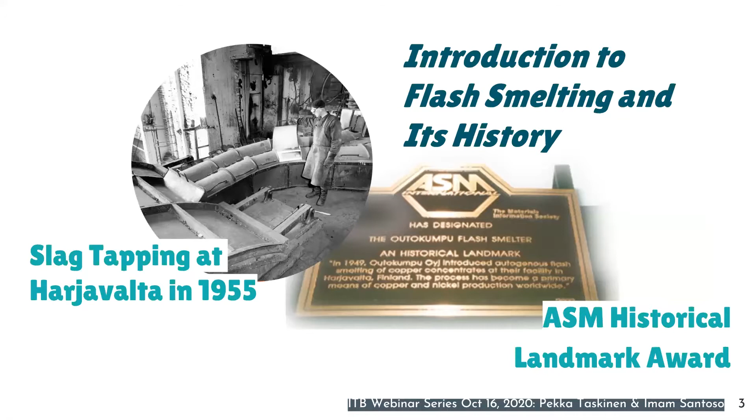First, because this is the first copper webinar of ITB, I decided to include some historical background into this talk. Flash smelting, as it was invented in Finland some 70 plus years ago, has some interesting features which may be of use in understanding some issues which come later. Flash smelting is an invention of the late 1940s, but its basic and fundamental areas were patented and presented already much before that, and what is the actual invention of this Finnish company Outokumpu, who put the idea into industrial use.

It is really the industrial large-scale operation of the first flash smelter, which was done in Harjavalta, Western Finland, in a smelter which is now called Boliden Harjavalta. Since that time, 57 flash smelting plants have been built and delivered to customers, and out of those, a few have been closed by now for various reasons.

So what is the essential feature of flash smelting and flash converting is that it generates its energy by itself. So the heat balance of the operation is the key to run the furnace on a continuous basis. And it is often described with such diagrams which tell on the left-hand side the reaction heat generated as a function of matte grade and the various flows of energy needed for heating up and maintaining the process temperature in the furnace for matte, slag, gases, and heat losses. And this is the core of running flash smelting.

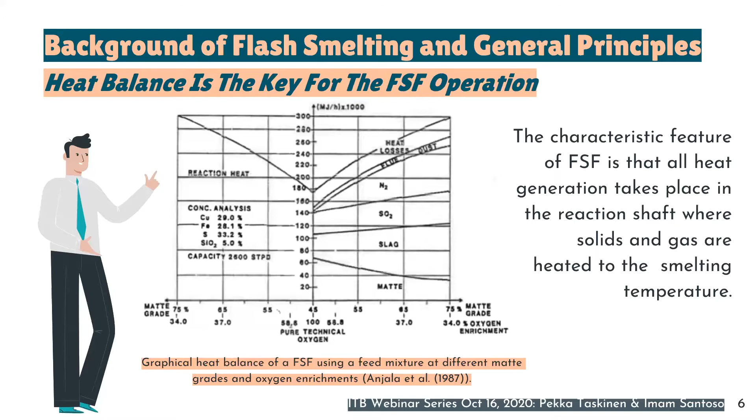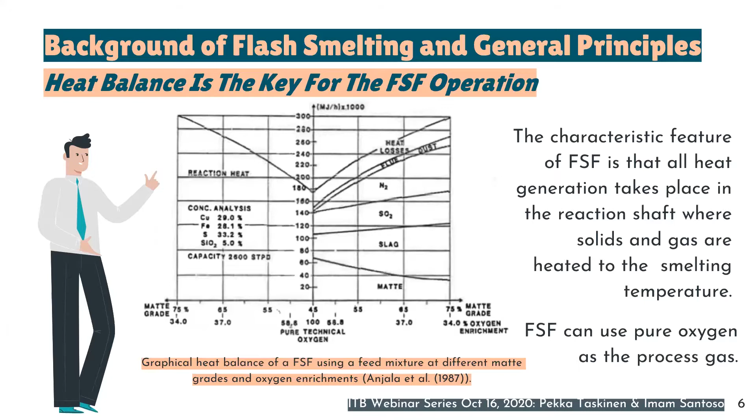And also pure technical oxygen can be used in flash smelting. So there's no limitations in that respect in the technology.

So why has this technology been successful, so that in 70+ years, more than 50 furnaces have been built. It's based on closed furnace design, reliable auxiliary equipment, and very much increased specific capacity since the very beginning. And this is a result of continuous R&D development of first flash smelting by Outokumpu and Outotec.

Another feature which may be minor in some opinions is that flash smelting, flash converting smelters and DON, direct Outotec nickel smelters, don't have launders. There is no ladle transport of matte, which technically allows easier scheduling of the smelting operation without fumes from ladles and launders.

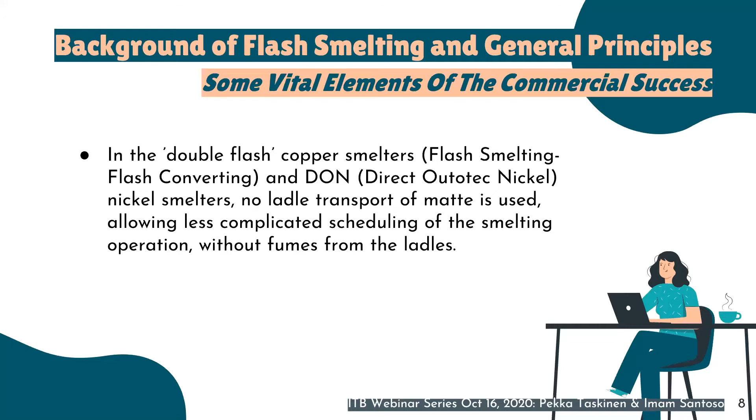What that means in practice, or has meant in practice, is that sulfur capture in flash smelting operations has been very high. The data comes from Brook Hunt, it's not Outotec data. And this graph shows the sulfur capture and its development from early 1990s to 2010.

It shows that the sulfur capture has been in flash smelting processes more than 90% all the time, whereas the other technologies, even though they have been improving, their share in sulfur capture to sulfuric acid has been rather low 30 years ago, and it's still much lower today than flash smelting.

And this autogeneity, the capability of collecting chemical energy from the sulfide concentrates, means that there's very little external energy, fossil fuels used, and that means that the carbon footprint of flash smelting has been always very small, going down along the years. But compared to other copper smelting technologies, this gap is between 30 and 40%.

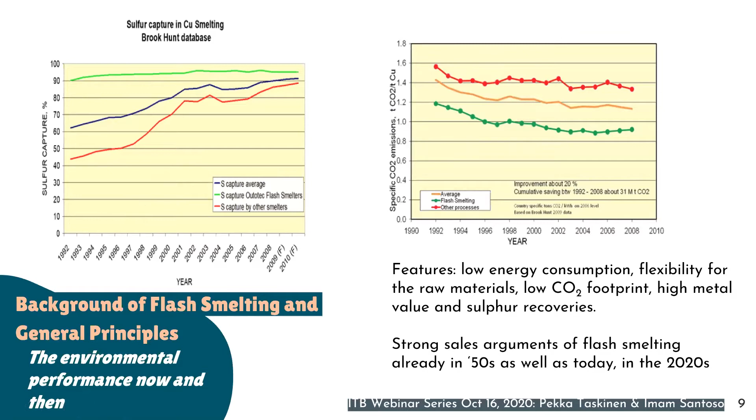So these have been always good sales arguments for the technology, and they still are that.

So what is the result of the originally selected furnace vessel design and the operation of flash smelting? No leakages of SO2 to external atmosphere, low fugitive emissions on the site, and good in-plant hygiene and best environmental performance amongst various copper smelting technologies.

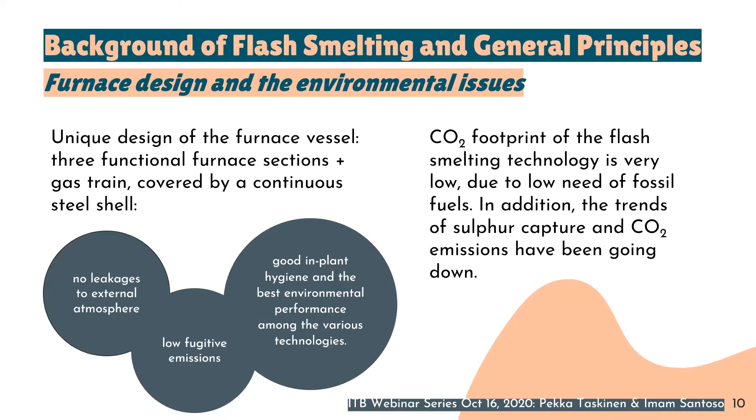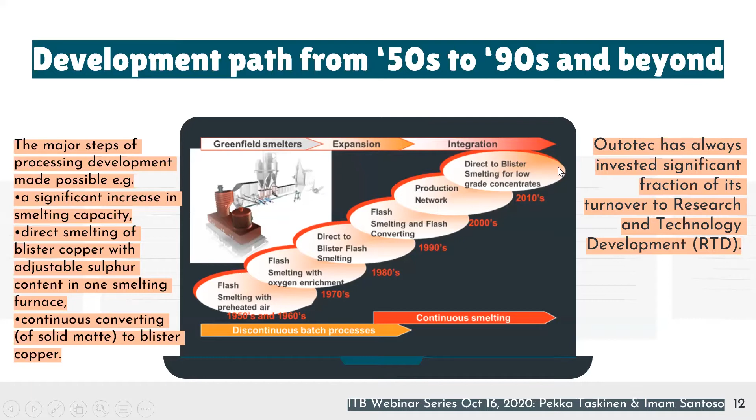So we had first air preheating, which was converted into strong oxygen enrichment. Then came direct-to-blister flash smelting and flash converting, and further on some refinements of these technologies.

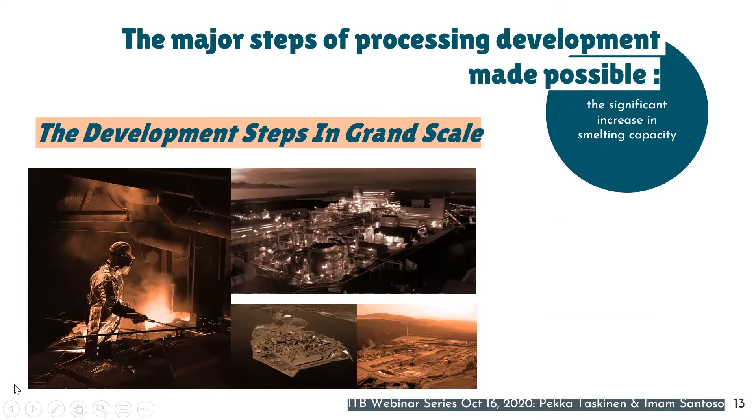So what we had there in a big scale development was significant increase in smelting capacity in furnaces which were built before, direct smelting of blister copper with adjustable sulfur content in one furnace, and continuous converting of solid matte to blister copper. So these are the major achievements in flash smelting.

And for those purposes, also a lot of advanced R&D tools were adopted in Outotec's activities from the 80s.

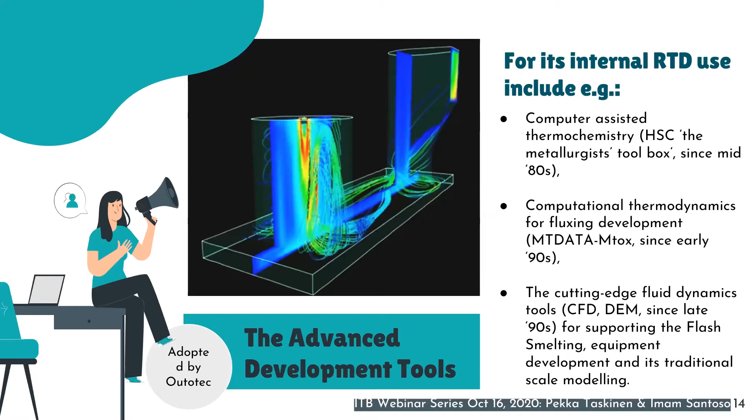And this ended up with, along with time, an increasing number of copper smelters and nickel smelters using flash smelting.

So the cumulative total capacity in the world by flash smelting has increased all the time, and today more than half of copper is produced by flash smelting furnaces and technologies with its various variants.

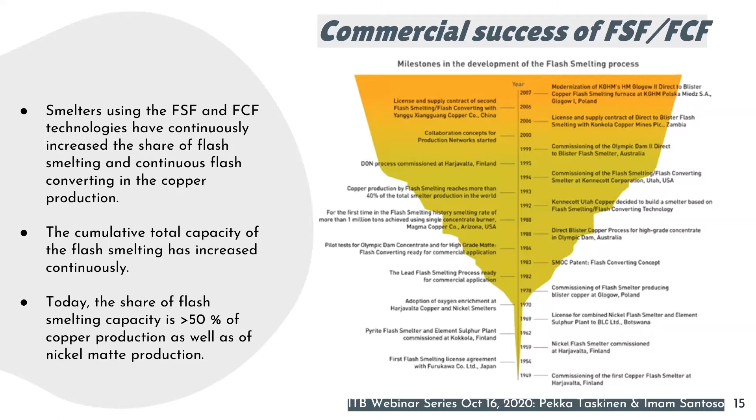All right, this was my lengthy introduction to you about the history and kind of boundary conditions where copper smelting was struggling in decades from the late 1940s till today.

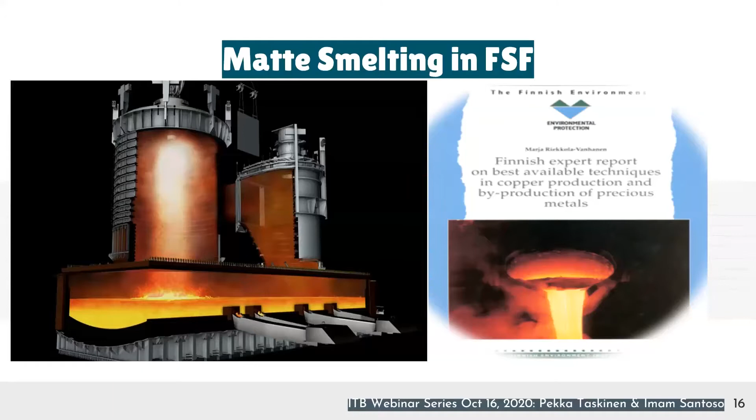As I pointed out earlier, the reaction shaft is the key energy source in flash smelting. So it is about 10 meters high, a hollow cylinder, vertical cylinder, where raw materials are fed.

Chemical reactions take place mostly here in the reaction shaft, and its specific feature is that all free oxygen which is fed is consumed from the gas by the level of the settler roof here. So there's no O2 molecules left in the gas. Everything has been consumed by the oxidation reactions of the copper sulfide minerals.

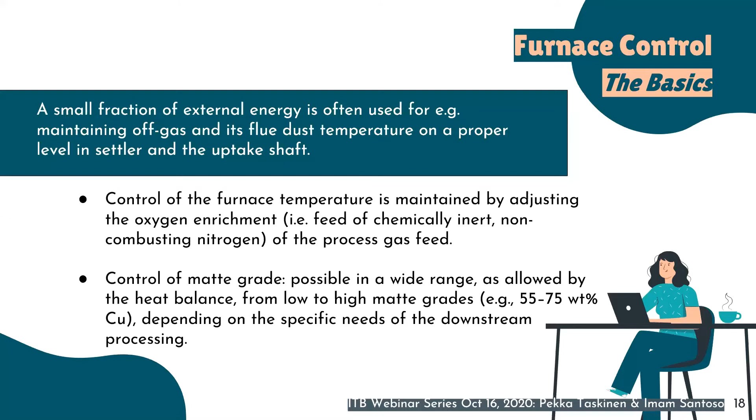So we control the matte grade by adjusting the oxygen coefficient of the reaction shaft. This oxygen coefficient, which is defined by total oxygen volume, pure oxygen, for each ton of feed mixture, is specific to every mixture and the target matte grade.

That can be adjusted independently in most cases from the adjustment of the heat generation, which is important. And as we will see later, the flight time for the concentrate to fall from the top of the reaction shaft to the settler is long enough for allowing this kind of matte grade adjustment.

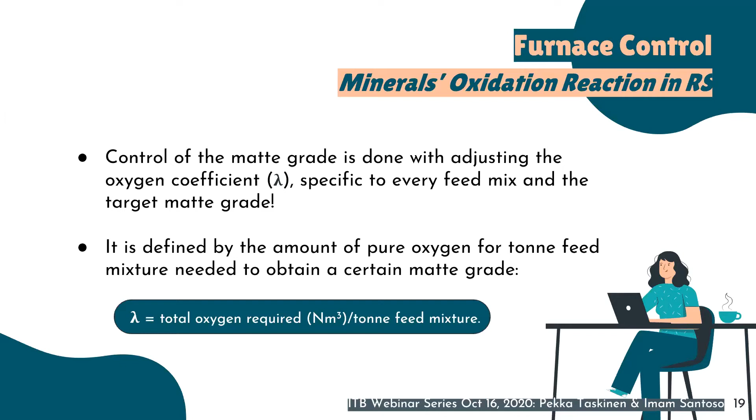As I said, all oxygen entered and introduced in the reaction shaft is captured by the concentrate and its oxidation reactions during that flight of the particles. So reactions take place in gas-solid-liquid suspension, and there's only 2 to 3 seconds, as we have estimated, for each particle to react, to be heated up and ignite, and capture the oxygen from the gas.

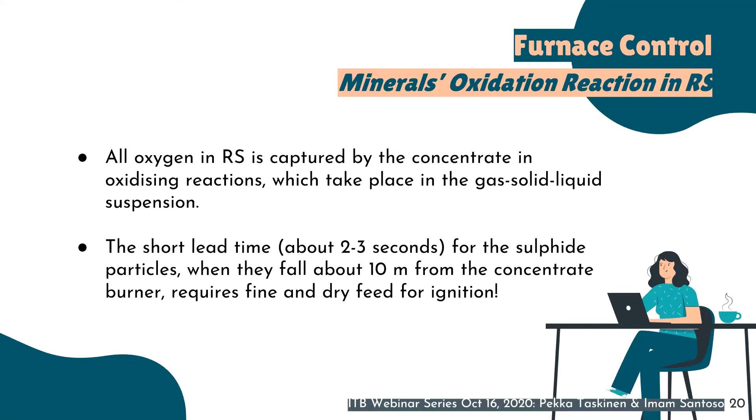This requires fine and dry feed material in order to secure ignition of the particles. So, to summarize what I just said: it can be done in such a way that the reaction shaft completes the oxidation reactions of the sulfide minerals.

The matte making and slag making reactions, the final assay of matte and slag, is generated in the settler, which also acts as a reservoir for the melt, waiting for tapping.

And the SO2-rich off-gas coming from the reaction shaft is led to the uptake and further on in the gas train, which is composed of heat recovery boiler, ESP, and further on blowers and acid plant.

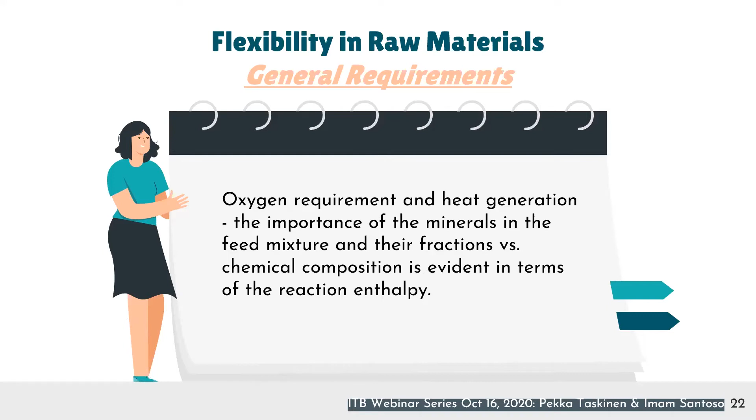Flash smelting is very flexible in terms of its raw materials. And it is evident that because we are dealing with heat generation, we are dealing with enthalpies, reaction enthalpies of oxidation reactions. It is not enough to know the chemistry of our feed mixture. We need to know also the mineralogical assays of our concentrates and other raw materials for calculating correctly the reaction enthalpy.

Otherwise we are not sure how much energy is generated or required by the components of the feed mixture. It is sure that all sulfides ignite and produce heat in the reaction shaft. That is what we know from various fundamental and practical tests and measurements.

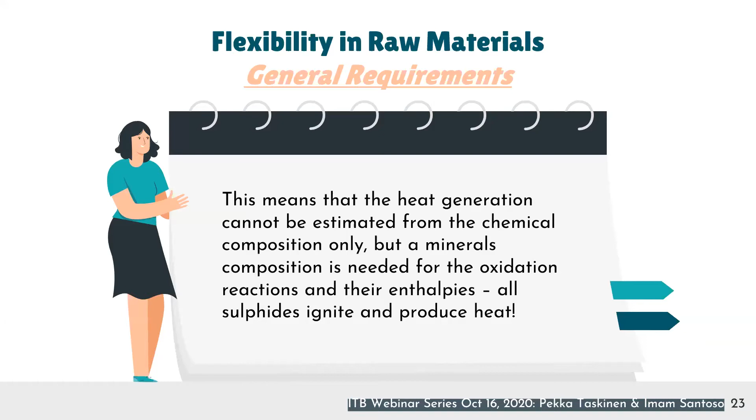This means that we have

Mr. Pekka, I think you are muted. Am I online now? Can you hear me?

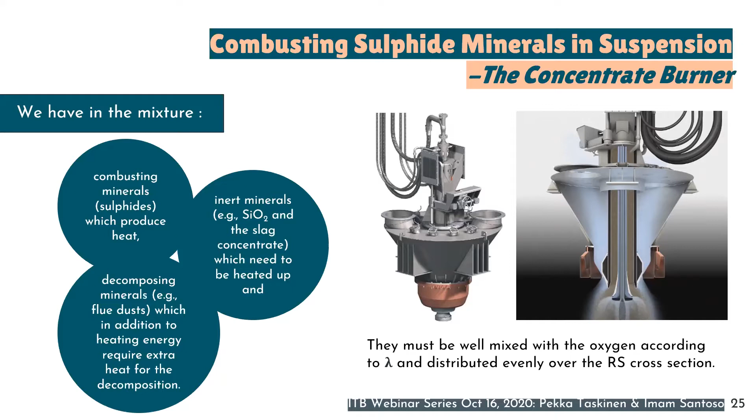And it starts essentially from bedding and feed mixture preparation, and that must be properly made. Drying must be properly made, and then weighing of raw materials into the burner and flash smelting furnace must be properly made. So it's a long line of things on top of that knowledge of chemical and mineralogical composition of your feed material you are introducing to your furnace. Stable matte grade is not achieved without those issues, following those requirements and needs.

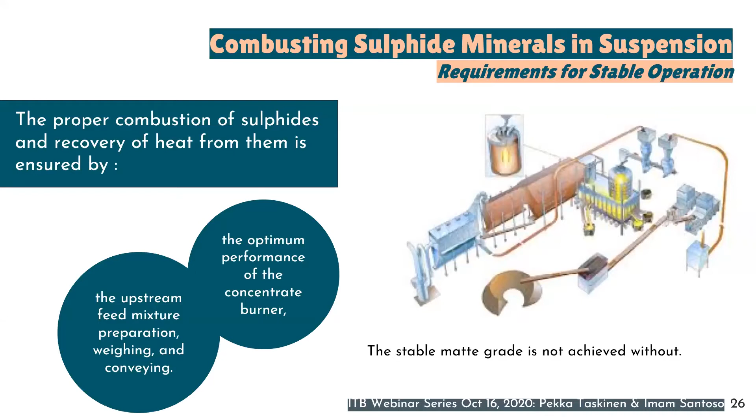So in this sense, flash smelting is advanced technology, which means that you must know what you are doing.

Let's go for a while to the fluxing chemistry of copper making, and this is an issue where you must take into account your raw material and your processing conditions. All copper smelters in the world use iron silicate slags, and in this issue today we can use thermodynamic simulations for forecasting what's happening in the flash smelting furnace, because that furnace is actually acting and operating close to thermodynamic equilibrium in the settler.

An exception of that is the entrainment of matte, which is not actually to large extent taking place in the settler, but close to the tapping holes where material streams entrain the other phase with it.

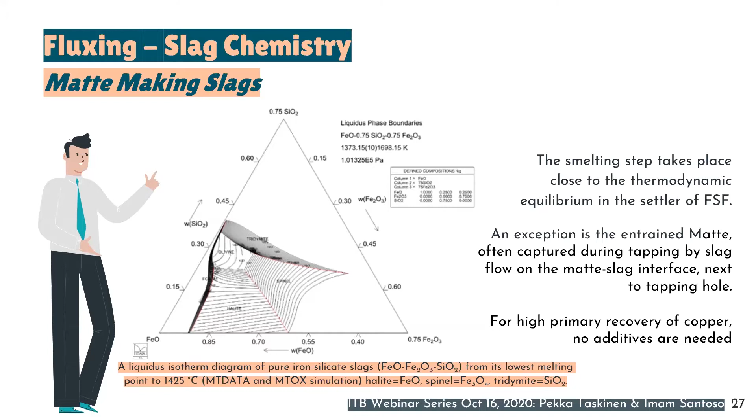One issue, however, is important in running copper flash smelting and copper smelting in general. It is the issue of magnetite content of slag. Copper smelters are following the oxidation degree of their smelting charge by sampling and measuring the magnetite content of the slag.

So it is giving an indication of ferric oxide content of the molten slag. There is no solid magnetite in the smelting furnace, but it precipitates very quickly out of the slag when the slag is cooled. And that is why, and because magnetite content is very easy to measure, magnetite content is used as indication of the oxidation degree, but it's not only a constant. It depends on the silica content of the slag and temperature.

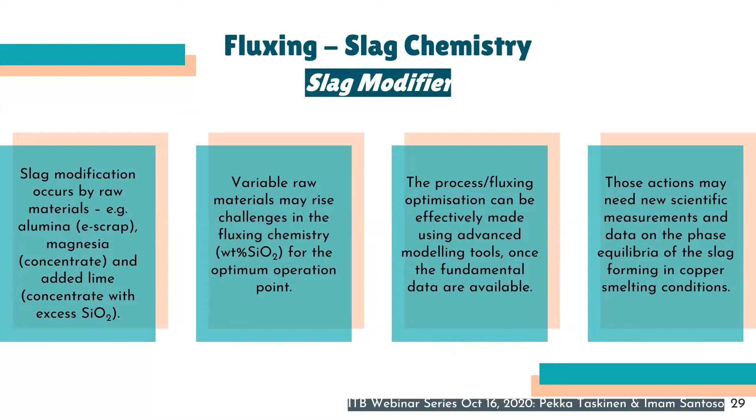Now I will talk about trace elements and their behavior in flash smelting, because they are often very valuable in copper metallurgy. The focus here is precious metals, silver and gold, and platinum group metals, which in most cases are not so common in copper sulfide raw materials, but may become important in cases where various electronic scrap materials are used as raw material in flash smelting.

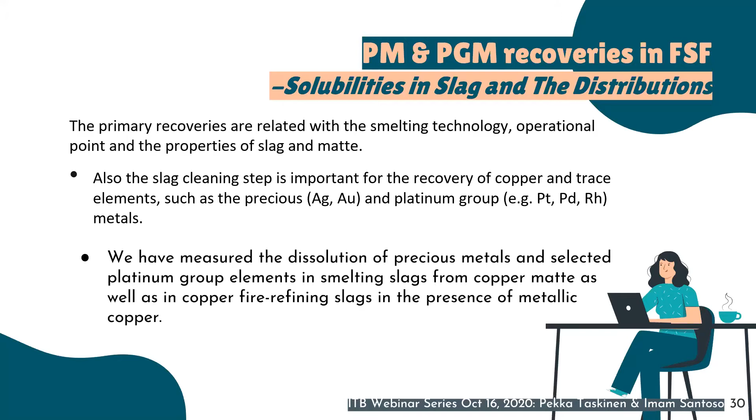So we have measured the behavior of these elements in flash smelting type conditions at Aalto University, including fire refining slags in presence of metallic copper. I will now show you a couple of examples how these elements behave in flash smelting, so matte-slag equilibria. All these metal losses are caused in all cases, including precious and platinum group metals.

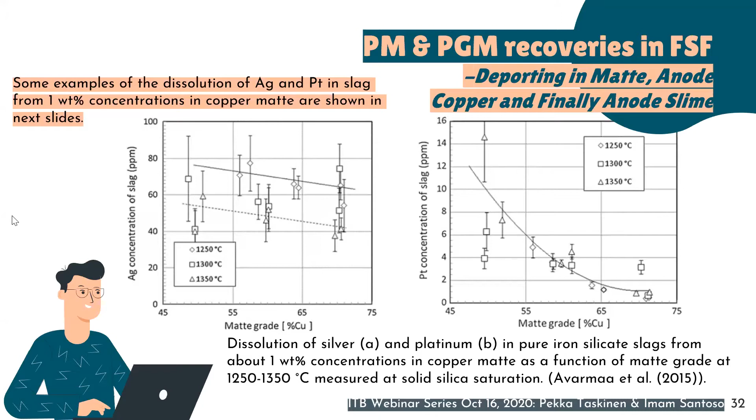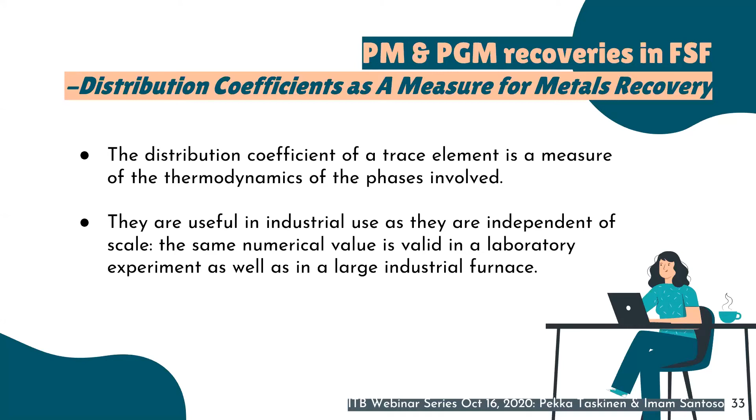So this is the primary data of such experimental observations, and what we do to generalize this primary data is use distribution coefficients to reflect the thermodynamics of these elements in both the matte and slag. These distribution coefficients are useful in industrial use as well because they are fully independent of scale. They are defined as the ratio of the trace element in matte divided by the trace element concentration in slag, and these can be basically obtained and calculated from industrial assays of the smelter as well, if the accuracies of analytical devices allow.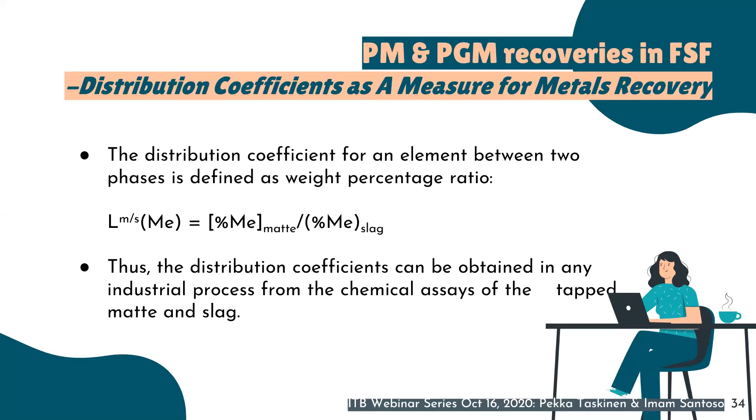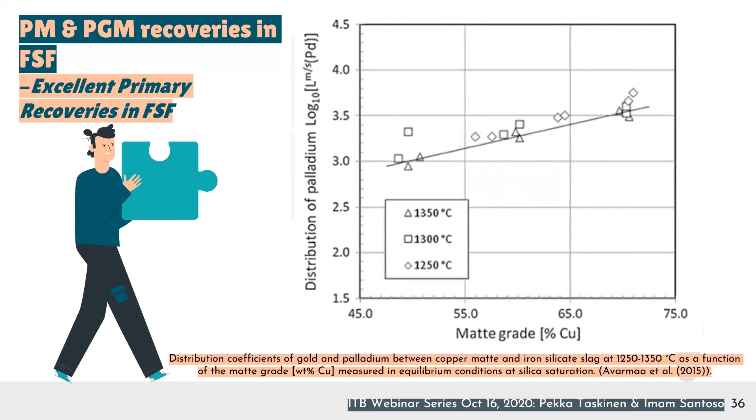So in case of gold, this distribution coefficient from those previous series of measurements at matte grades of 65 to 70% copper, they are over 1,000 - this is logarithmic coefficient - from 2 to 3,000. And in case of palladium, even higher, so more than 4,000.

This means that even in smelting cases where low-grade copper matte is produced, the distribution coefficients of platinum group metals and gold are extremely high. This means that the primary recovery of these metals is more than 3 nines - 99.9% going into matte at smelting temperatures. This is actually meaning that what you must be careful with in matte smelting is the entrainment of matte in your slags, because most of platinum group and gold losses occur in the form of that entrained matte. It's clearly calculated from that distribution coefficient itself.

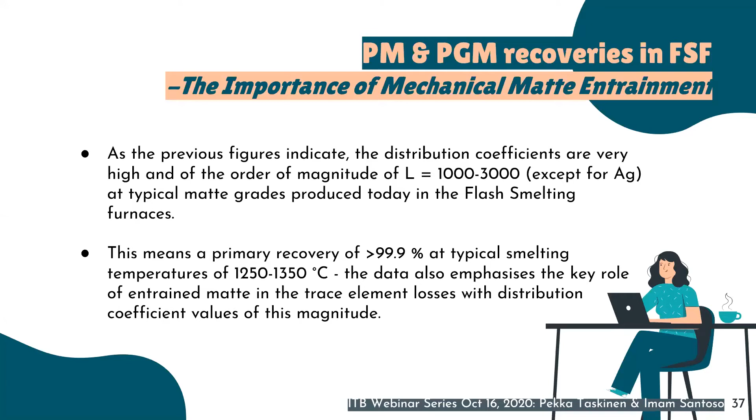So those measurements were calculated in laboratory conditions with pure iron silicate slags at silica saturation. In industrial slags, we always have small amounts of alumina, magnesia, lime, potassium, soda, and those basically are increasing the distribution coefficient. So they are even better with small amounts of these slag modifiers in the slag.

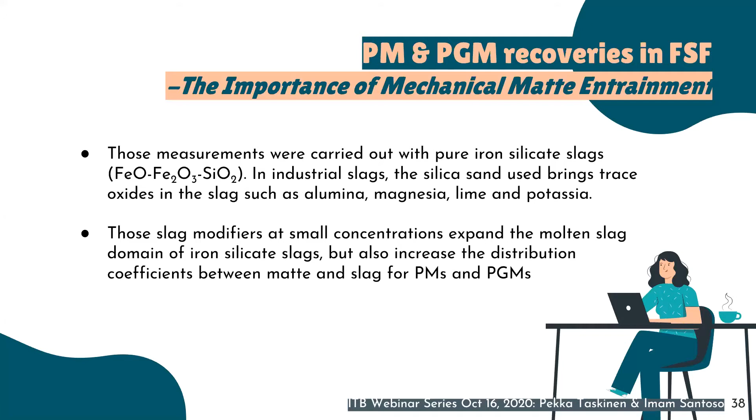So the online availability of a smelter is the key for making money. In flash smelting, this online availability means that all these auxiliary equipments are operating properly, and because it is one line, one pipeline, the reliable operation of each step is contributing to the reliability of the smelting line, thus increasing the online availability of the smelter and tonnages smelted and processed at the site.

I shortly go through now with issues related to the off-gas line, because those are seldom discussed in any textbooks or in the literature. So why is the gas train important in terms of the online availability? It is because of the flue dust mostly. This uptake shaft, which is connecting the settler with the heat recovery boiler, is the first part of the flue dust management. There we oxidize all sulfidic particles which may be present in the flue dust.

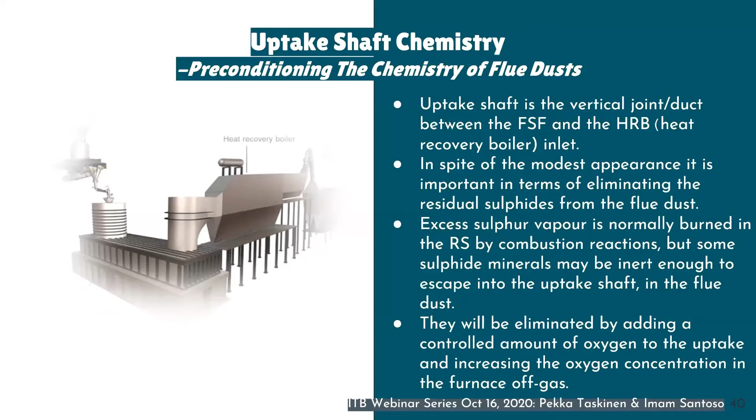So adding controlled amount of oxygen from here, sulfides are oxidized, and that is important for the next step of the flue dust management, which is taking place in the heat recovery boiler.

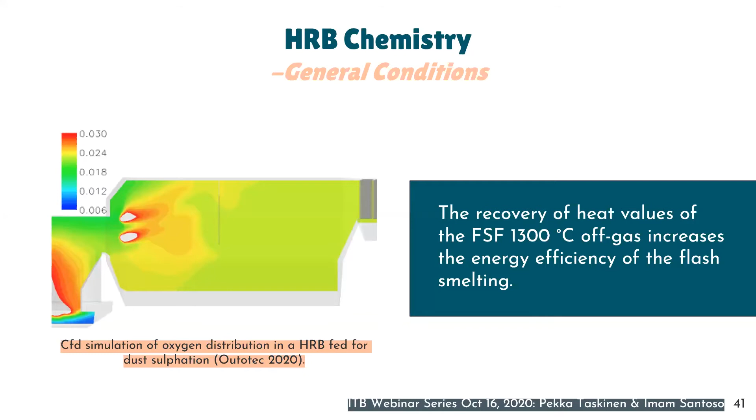This heat recovery boiler is a big hollow device where oxygen is added to the cooling gas, and when temperature goes down, it causes some oxides to be converted into sulfates. So the heat recovery boiler was introduced in the flash smelting line for capturing heat values, which are converted into steam, and that steam can be used for heating purposes, drying the feed mixture, or generating electricity to the local grid.

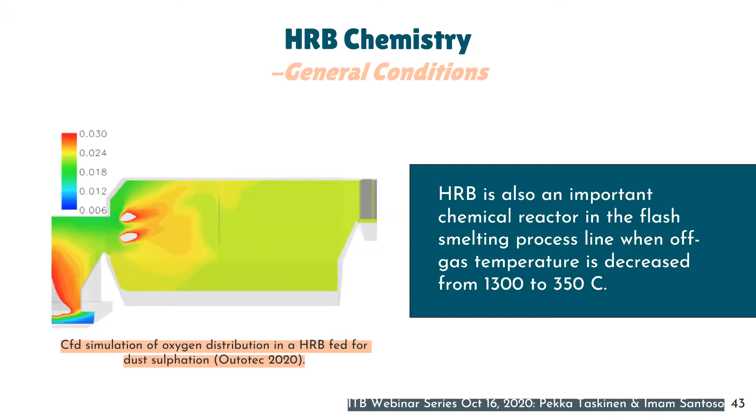But the chemistry in the heat recovery boiler is equally important from an operational point of view. The flowability of flue dust is ensured by controlling these sulfate-forming reactions in the boiler, and those reactions need oxidation of sulfur dioxide into trioxide, which is usually an exothermal reaction and a large contributor to the heat output of the heat recovery boiler.

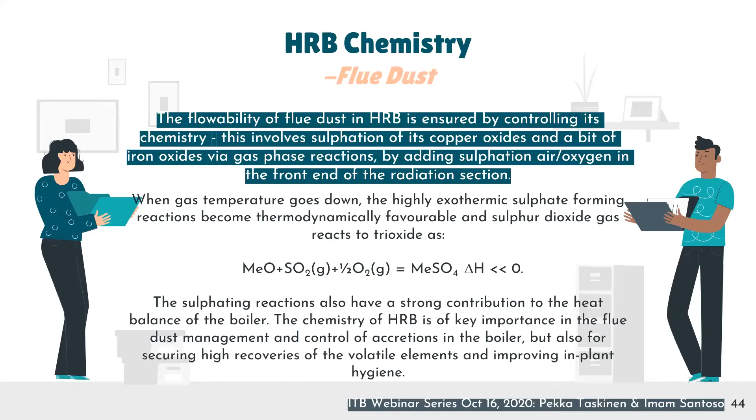This way we get flowable flue dust, which can be taken out from the boiler. In cases it doesn't flow, it forms accretions and blocks the off-gas line, the off-gas train.

Volatiles react and form fumes in the smelting vessel itself, in the settler and reaction shaft, and they condense as temperature goes down. Some elements like rhenium and arsenic don't even condense in the boiler; they end up in the washing section of the acid plant, where typically rhenium is recovered in some smelters.

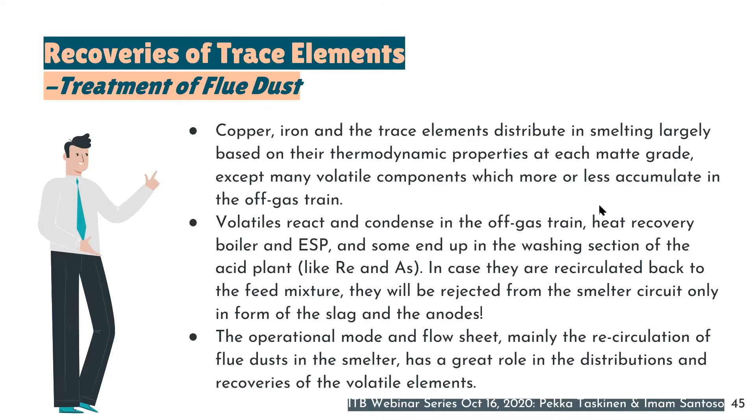So this is what happens in the boiler, and its contribution to the distribution of volatiles in flash smelting depends on how flue dust is treated — is it fed back into the slag or treated separately? This is the key question.

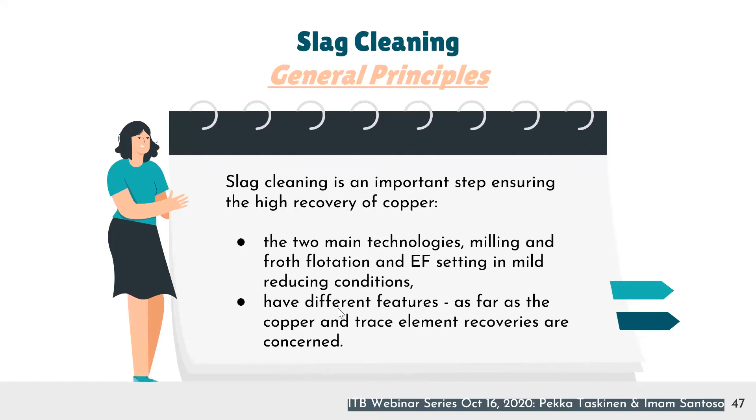Yes, this summarizes the issues. A few words about the last step of primary or flash smelting: it produces slag which must be treated because of copper recovery. Slag cleaning ensures high recovery of copper in flash smelting. There are two main technologies: milling and flotation, and electric furnace reduction with mild reduction and settling. These have some importance in trace element distributions and recoveries, in addition to copper recovery.

The physical characteristics of the tailings from these slag cleaning operations are different. Milling and flotation give a very fine silt, which is useless for reuse elsewhere, whereas cast blocks of slag or gravel may be used for construction purposes in civil engineering.

The difference between these two methods is that milling and flotation gives better recovery of copper, so the tails in flotation may contain only 0.25 or 0.3% copper, whereas electric furnace cleaning is always close to 1%. This is a question of the efficiency of the smelter.

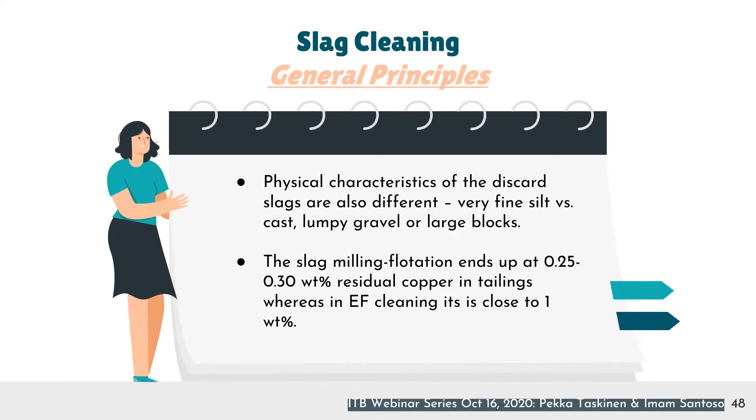What's important in terms of trace elements is the reaction occurring during solidification of the slag in milling and flotation processes, where ferrous oxide and copper oxide dissolved in the slag react, forming magnetite and metallic copper. This metallic copper dissolves weakly bound metals from the slag during the slow cooling process, typically arsenic and antimony, which are then recirculated back into smelting together with the slag concentrate. This has an impact on the behavior of harmful and also useful trace elements in copper smelting.

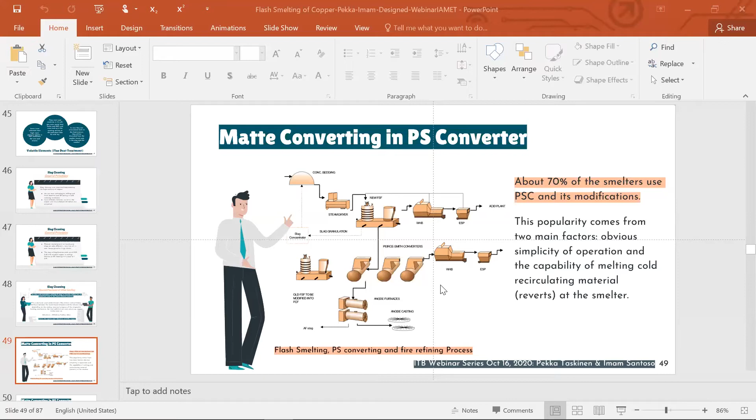Okay. Now I think it's Imam's time to continue. Yes. Thank you, Pekka. Please, yeah, the second presenter would be Mr. Imam Santoso. He is a lecturer at ITB currently. Pak Imam will present the third and fourth parts of this presentation. Time is yours, Pak Imam. Monggo, Pak.

Okay, thank you, Bang Erika, and thank you, Pekka. Actually the expert is Pekka, Bang Erika — I'm just his student, so hopefully I can present well today, because there are a lot of experts here. I see Pak Durban has also joined, and many other copper smelter experts in Indonesia. I hope everyone doesn't fall asleep, because I will talk a lot about chemistry and phase diagrams, so I hope everyone can enjoy it, and I'll try to make it as quick as possible.

Okay, if Pekka produced matte, now it's time to change from matte to copper, and this process is called the matte converting process. So we will talk about converting matte, which is a copper, iron, and sulfur mixture, into copper. If we talk about the converting process, 70% of converting worldwide uses the Peirce-Smith converter. Why is this so popular? For two reasons: it is a simple operation, and it can also be fed recirculating material such as copper scrap. However, while it is simple, the Peirce-Smith converter is a batch process.

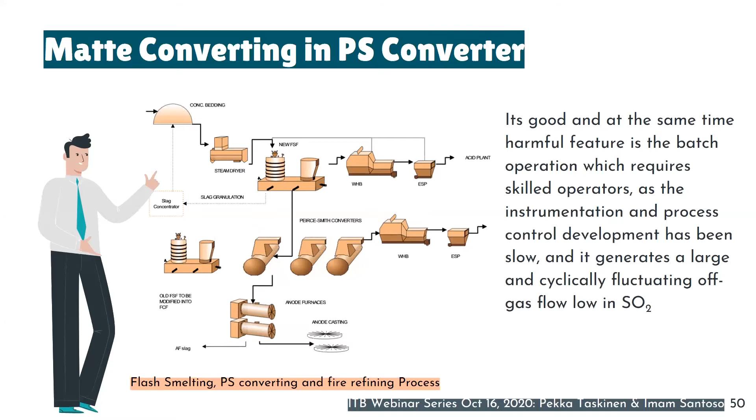It needs very skilled operators, and because the process control development of the Peirce-Smith converter is very slow, it really depends on the skilled operator. Another disadvantage of the Peirce-Smith converter is that it produces gas flow that contains very low sulfur dioxide.

This is the process in matte converting using a Peirce-Smith converter that the operator undertakes in a control room. First, the matte is charged to the converter. The converter is tilted, and then we introduce oxygen for the blowing process. After slag is formed and iron is already removed, we skim that slag. So basically these are the three main processes the operator undertakes: charging, blowing, and skimming.

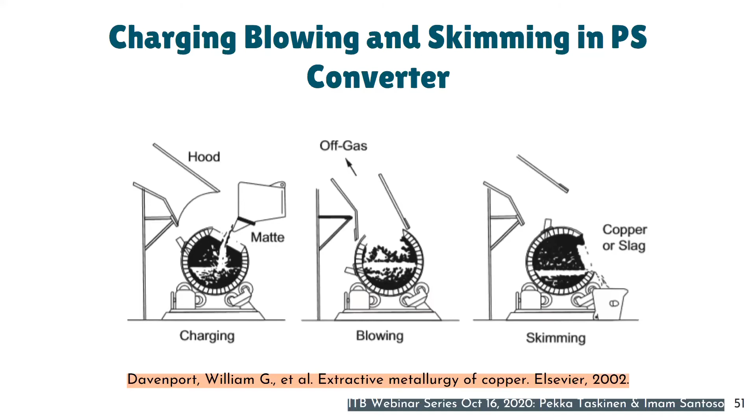This is the main development of Peirce-Smith operation. There is a lot of research, but the main research here on the Peirce-Smith converter is mainly that control is still very limited in the Peirce-Smith converter.

Next, what is the reaction? What happens in the converting process? In converting, we want to convert matte into copper by introducing oxygen and also silica as a flux.

There are two main reactions. The first reaction is oxygen reacting with iron, producing slag. The second reaction is oxygen reacting with copper sulfide, producing copper and sulfur dioxide gas. So the first reaction is called slag blow or slag making process.

After the iron is removed or goes into the slag, it's now time to blow to produce copper. This is called copper blow. So these are the two main reactions that have to be remembered.

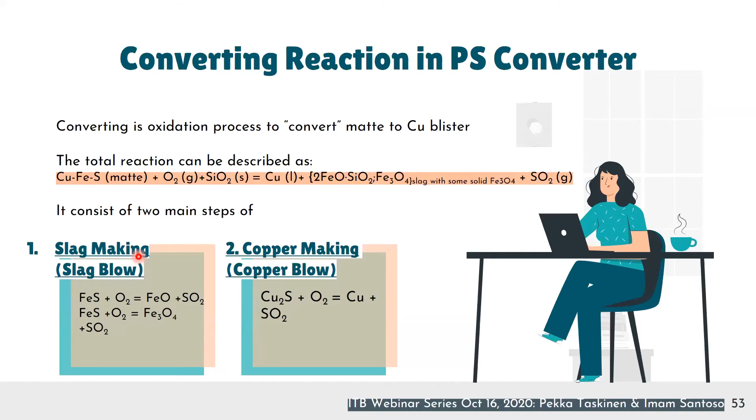Right now I want to talk a little bit about slag chemistry in the converting process, because in slag blowing, the first step of converting is removing the iron, so it is called slag blowing or iron blowing. It's important to see the phase diagram with silica in the top corner, and then wustite and hematite, because iron in the slag can also form as magnetite. So this ternary diagram is very good for describing the situation that happens in the slag.

The blue line here describes the oxygen pressure in the system. When it moves to the right, the oxygen pressure is increasing, meaning the condition is more oxidizing. For example, here the oxygen pressure is 10 minus 3, which is very oxidizing, but on the left it is less oxidizing. When we want to produce good slag, it needs to be very liquid, and this is the liquid area of the liquid slag.

The second thing is that we need a very oxidizing condition, because converting is an oxidizing process. So if the condition is very oxidized, we can remove a lot of iron. So the most oxidizing condition is point A. At point A, we still have slag, and the oxygen pressure is high.

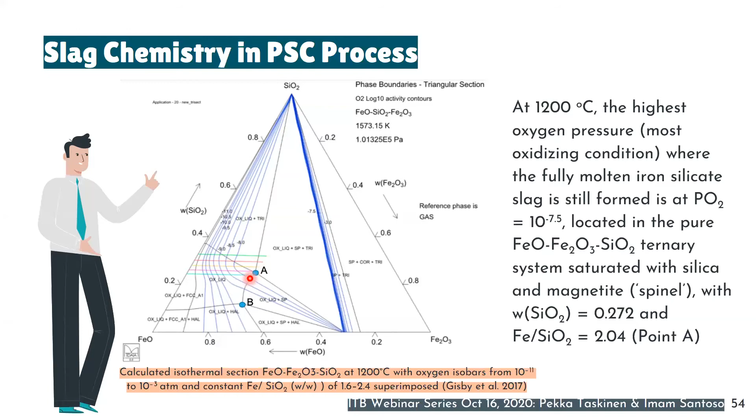If we use an oxygen pressure of, for example, minus 3, we don't have liquid slag anymore because the slag is in a different region. So the indication that the process is good is when we see the slag contains silica and magnetite, because point A is slag in saturation with silica and magnetite.

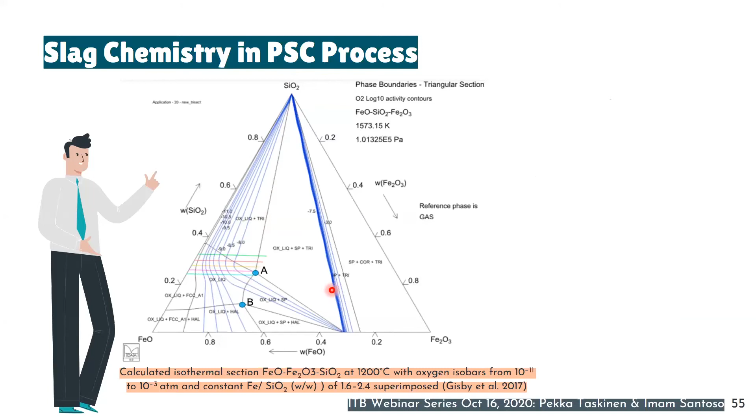Before, at the end of the iron blowing or slag blowing, usually the slag composition is a little bit under point A. If the slag is under point A, it is in saturation with magnetite. So before the process moves to the second step, which is copper blowing, the slag blowing can be seen to be already finished by the saturation of magnetite. Usually the slag that describes the end of slag blowing will have magnetite, or slag in saturation with magnetite. This is the point of magnetite.

Therefore, in a converting process, the slag is controlled to have an iron to silica ratio around 2.04. Again, because iron in the slag can form as Fe, magnetite, or wustite, we use iron divided by silica, which has to be bigger than 2.04, in order to get optimum conditions and also to have very good slag.

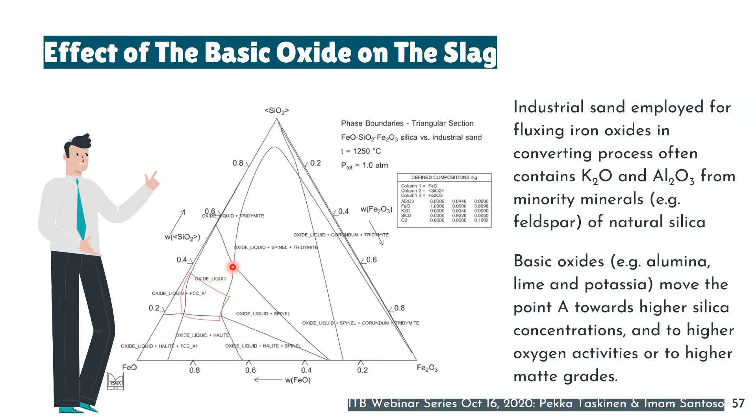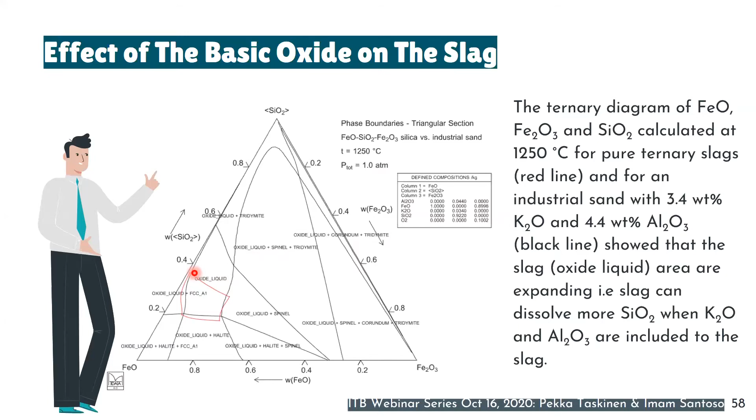So the red line is when the slag doesn't contain any potassium or alumina, or it is pure iron silicate slag. We can see that the stability of the slag again becomes larger. And in addition, when we decrease the temperature, the liquid slag area also becomes smaller. So we have done a lot to get the optimum condition in the converting process - it is temperature, and it is also impurities.

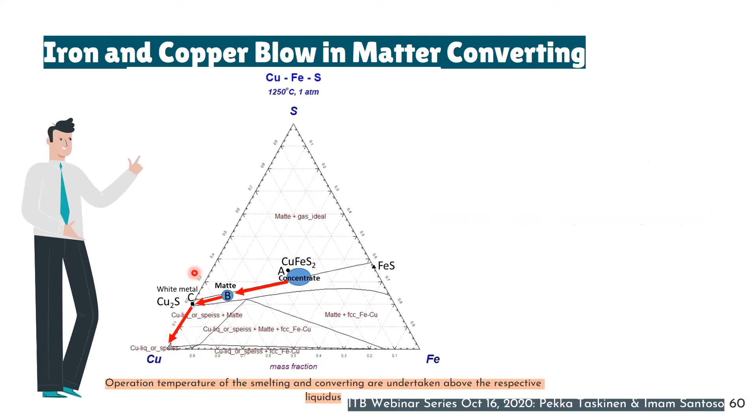Okay, we just talked about the slag chemistry in the converting process, in slag blowing. So basically, this is what happened to the matte. We can see here we have concentrate. This is a ternary diagram of copper, sulfur and iron. The concentrate's location in the ternary system is here. Point A is a chalcopyrite concentrate.

So more or less the concentrate is located in this blue circle. So when it is melted, like in flash smelting process, the concentrate composition will move from point A to point B. We can see here that during smelting, from point A to point B, the copper concentration is increasing and the iron concentration is decreasing. So basically during matte smelting, we're removing iron and sulfur.

And from B to C, this is the converting process, first step, which is slag blowing. So during slag blowing, the concentration moves from B to C. In C, we don't have any more iron, or the iron is very, very small. So during converting in the slag blowing process, from B to C, it is clear that we are removing almost all of the iron. So now we are in the location of the binary copper and sulfur area. So again, actually smelting and converting, we can describe the matte composition roughly in the binary Cu2S and FeS.

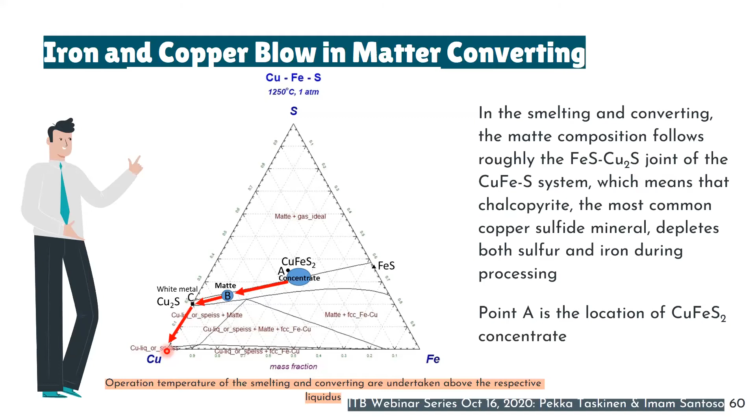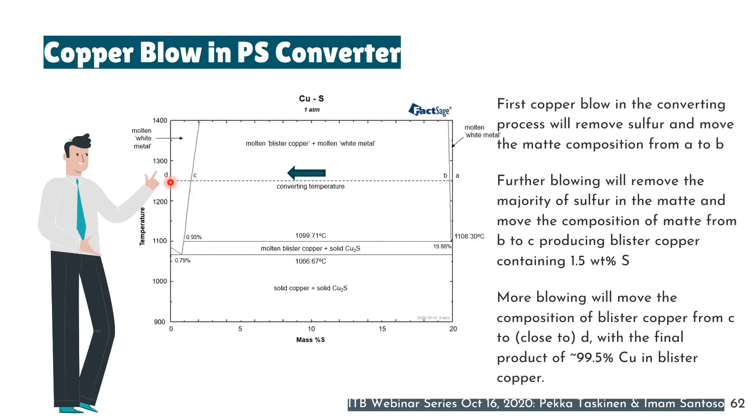So I already described this one, and now this is the copper blowing. In copper blowing, after almost all of the iron is removed, we are now at point A. At point A, we see that the sulfur is around 20% and the copper is around 80%. So during copper blowing, we remove the composition from point A to point D. Point D is almost pure copper. So this is basically the process of converting.

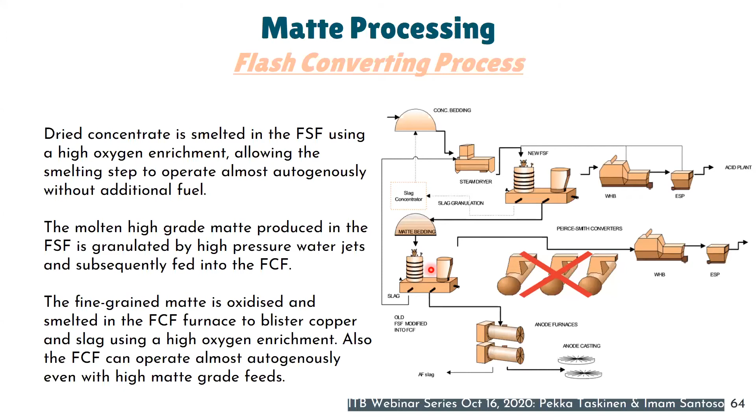So if we use the flash converting process, we don't need the Peirce-Smith converter any more. Now we need a flash converting reactor. The shape and design is almost the same as the flash smelting furnace. We can see here from the diagram that matte from the flash smelting furnace is granulated, and after being granulated, it is ground, and after it is ground, it is fed to the flash converting furnace. Also, the same process is autogenous, and enriched oxygen gas is used here because we use enriched oxygen gas - the ratio between matte introduced to the furnace and the oxygen.

So the gas flowing out from this furnace is continuous. It will keep going. The gas here will have a process.

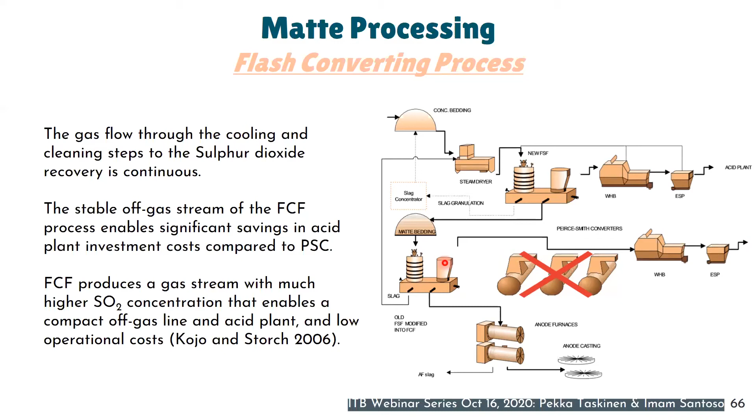It needs to be mentioned that the process in the flash converting reactor needs to be maintained steady, with no fluctuations, because of constant operation. Therefore, the matte fed to the flash converting process needs to be very homogeneous, or almost the same in concentration.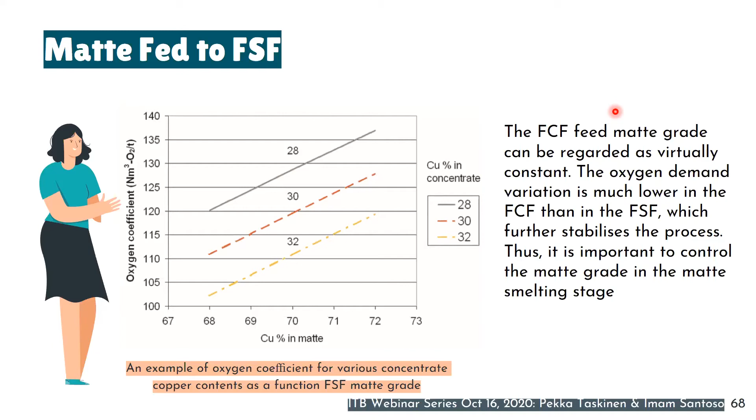How do we control the matte in the flash smelting furnace? As Pekka already mentioned, we can control it with the oxygen coefficient. In the flash smelting furnace, the variation of the oxygen coefficient can be 20%, because the concentrate can vary a lot, coming from different suppliers around the world. So the flash smelting furnace operation can accept that variation, around 20% in the oxygen coefficient, but this is different from the converting furnace, which needs very steady operation.

We can see here, if the copper in the concentrate is very low, for example 28%, it will need more oxygen to make the same matte grade, for example 70%. But if the concentrate already has a high grade of copper, say 32%, it needs less oxygen.

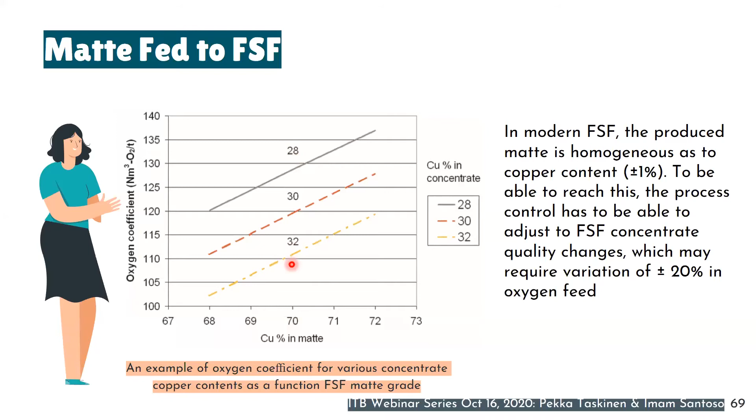Now the converting process produces blister copper, but the blister copper itself still has a very high content of sulfur, around 0.01 to 0.05 in terms of sulfur, and the oxygen can be 0.1 to 0.8%. The sulfur and oxygen are still very high.

Therefore, the blister copper from the converting process needs to be refined, and the process for refining blister copper is called fire refining, because we use oxygen. We use oxygen again, and we can see here, after the first oxidation, because we use oxygen, as we will see later, the sulfur is reduced from 0.1 to 0.02.

However, at the same time, oxygen increases. Why? Because when we remove sulfur, we introduce oxygen. Therefore, in fire refining, we still have a process similar to the converting process, with two steps of refining: first, we remove sulfur with oxygen, and second, we remove oxygen with hydrocarbon.

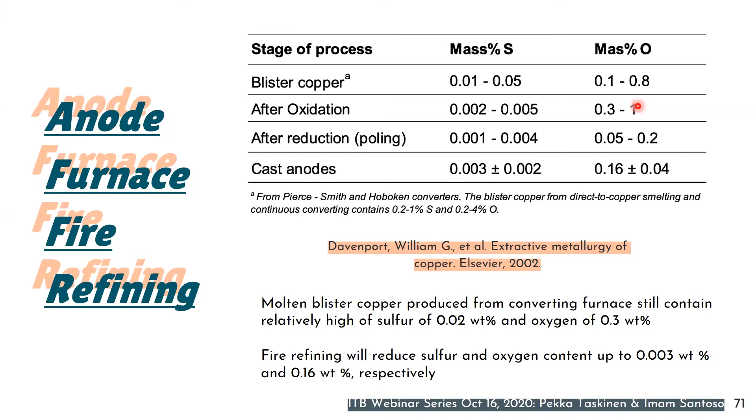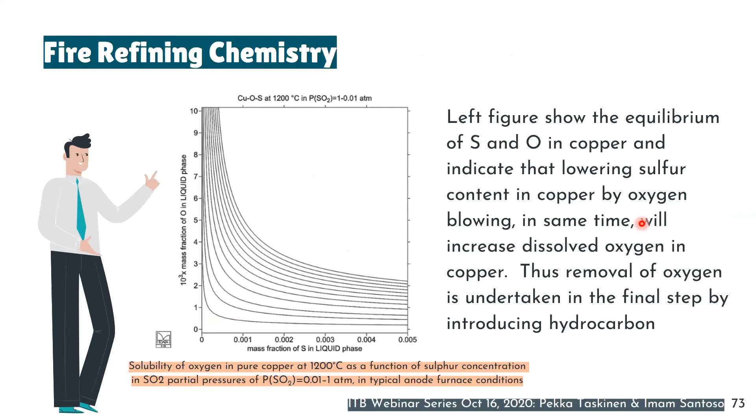Again, this is the same relation. When we have very low sulfur content in the copper, the oxygen will be very high, and thus we need a two-step process. This is the reaction mainly: first we remove sulfur with oxygen, and oxygen will be dissolved in the copper, and after that we remove oxygen with hydrocarbon.

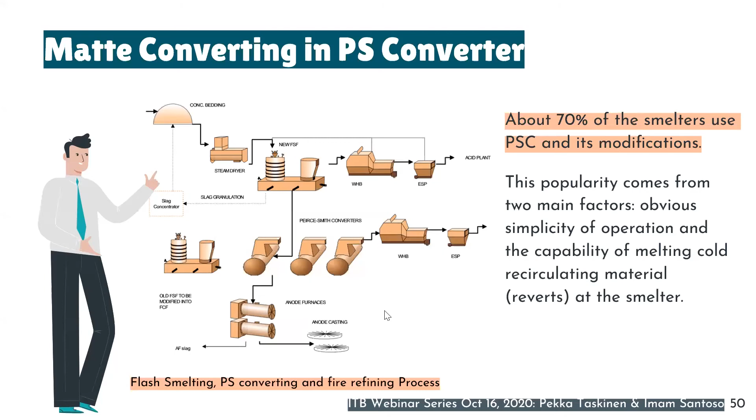Let's go to the future trends and possible needs of copper smelting. Forecasting the future is always a demanding task, so I will only show you some personal ideas which are rather evident at this point of view. The visibility of the future is not very long, not in any subject, and not in copper smelting either.

So I will concentrate on a few things, meaning that raw materials are the challenge in the future, and I will give you some ideas of the future trends in process control issues as well.

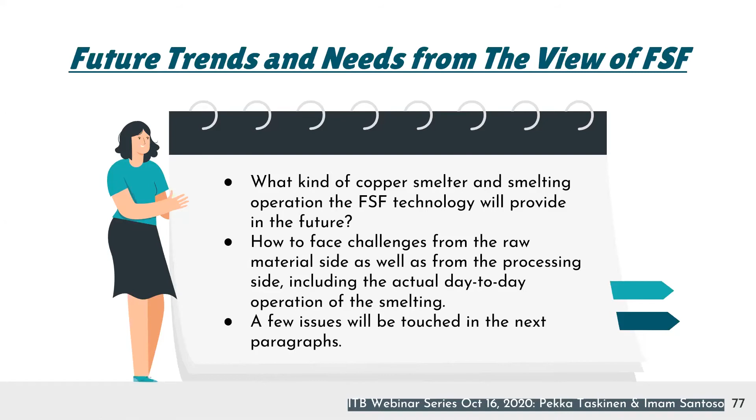Complex concentrates must be taken into use in the future because of ever-growing demand of metals, and that means we will face two types of raw material issues which have been coming gradually but will be more so in the future. One issue is that grades of valuable metals are lower because of this complexity, and then we will see new elements coming into our copper smelting circuits. Some are harmful, some are valuable, and some are in short supply in the future world.

So flash smelters generally, like in your case, are large capacity processing units which allow very high feed rates and very wide and extensive raw material mixtures once you know what to do.

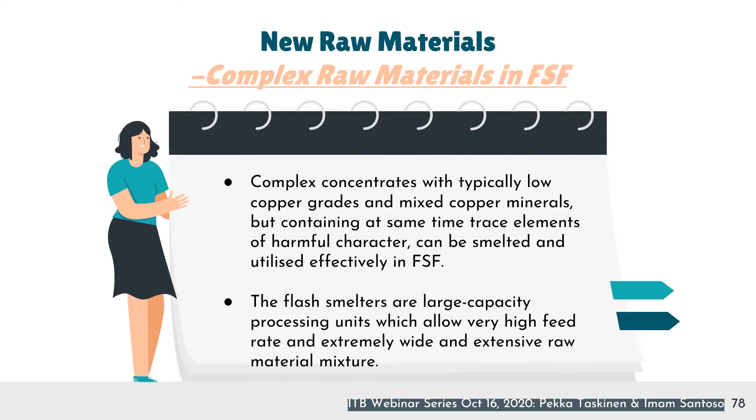So what are the challenges? The big one, not secret to anyone today, is that we are generating in the world - this statistic is from last year - 7 kilos per capita of waste regarded as electronic or electric equipment waste. That means there is a huge amount of valuable metals, and existing smelters of various types, including copper smelters, are the suitable processes for treating and recovering those metals.

So e-scrap is also today the fastest growing waste in the world, and it contains large amounts of copper and precious metals. This is something we must keep in mind and take into account when we are forecasting copper smelting.

So this means new elements from electronic scrap are coming to the smelting circuits, and we need to ensure that valuable things like precious metals and platinum group metals are recovered.

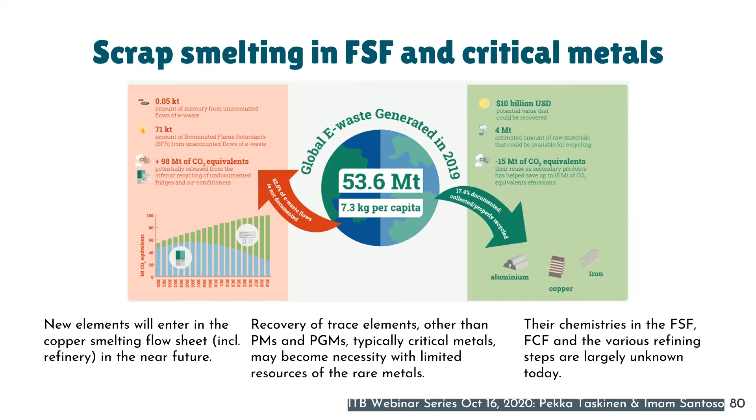Then artificial intelligence is an issue in all processing branches for materials, and that means we will see various applications also in flash smelting, which are based on digitalization and digital tools for monitoring the processes, intelligent control, and for various online offline simulation purposes.

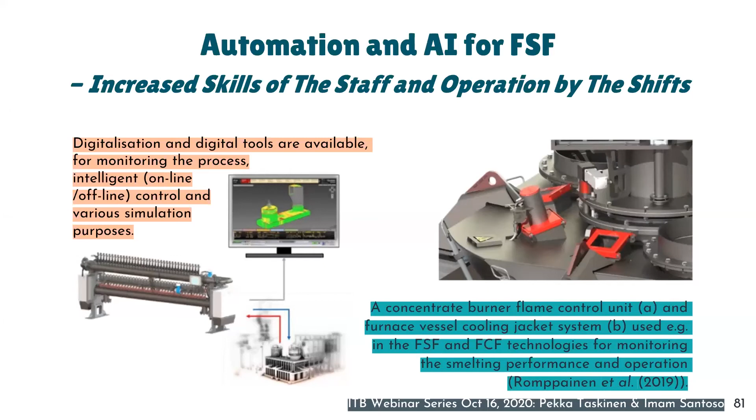So we know there are new control devices and observation possibilities for flame concentrate combustion control in flash smelting reaction shafts, and those will improve performance of the smelter and increase online availability. These also mean that, because they can be used as offline simulators, they will provide increased skills for the staff and operations, since they can be used for simulating cases which are dangerous in real operating smelters.

So these process advisors are on a routine basis used either as offline aids, or even in some cases as online controllers for smelting in flash smelters.

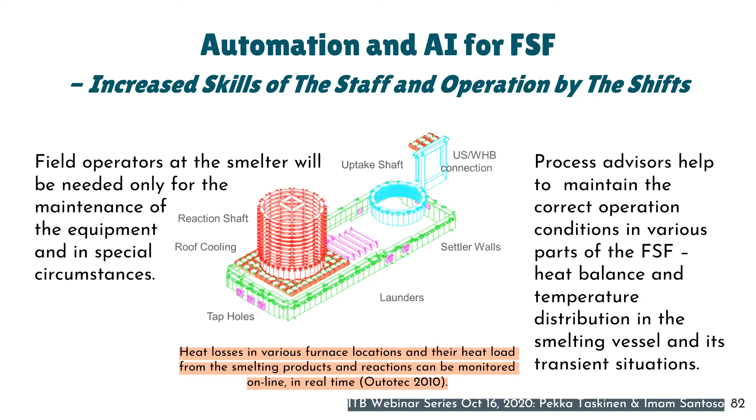So high recoveries of copper and side metals, typically gold, good energy efficiency, low emissions, and also efficient use of water and efficient waste management, which is not a minor thing, as is also the security, safety, and health issues in flash smelting.

So I think this was what I had in mind, and now I hand over to Imam for his final words.

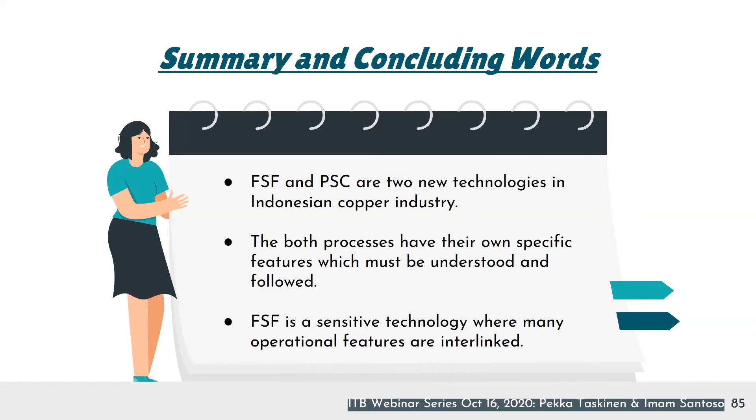So flash smelting furnace and Peirce-Smith converter will be new in Indonesia. Both processes have their own specific features, which must be understood and followed. Flash smelting furnace is a sensitive technology where many operational features are interlinked, and Peirce-Smith converter is a batch process that needs experienced and skilled operators.

And also, this is one of the very important points: university cooperation, partnership, and continuous education of staff cannot be emphasized too much when building the national knowledge base. It means if we want to build the national knowledge base, technological know-how and also business know-how, everything has to be here in Indonesia. So, thank you.

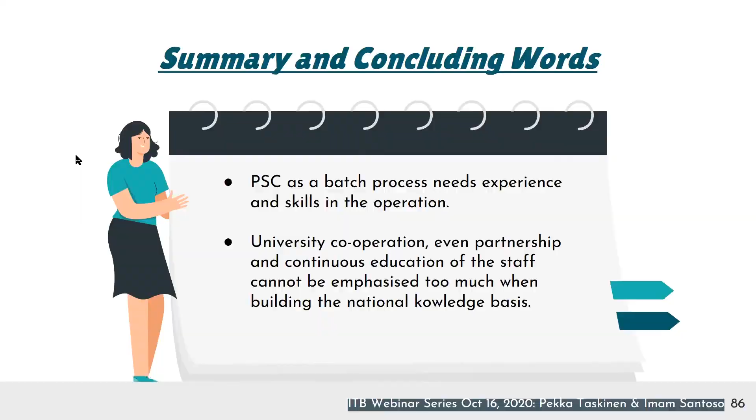During the six sections of the presentation, we noted several interesting topics, starting from the introduction to flash smelting and its history, which was invented in the 1940s, and then why this technology became a leader for about 70 years because of continuous development in capacity, reliability, auxiliary systems, as well as the technical side covering high sulfur capture. And then in matte smelting in FSF, we have the concept of FSF.

We noted several concepts of the FSF flash smelting furnace, and then in matte processing in PS, the Peirce-Smith converter, as well as the flash converting furnace. We have the comparison between the two, also the anode furnace fire refining. And also we have the future trends, needs in flash smelting, and the concluding words.